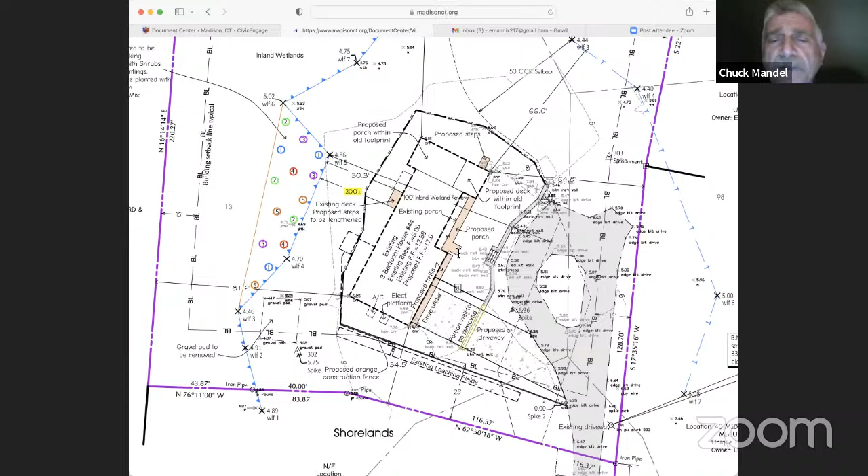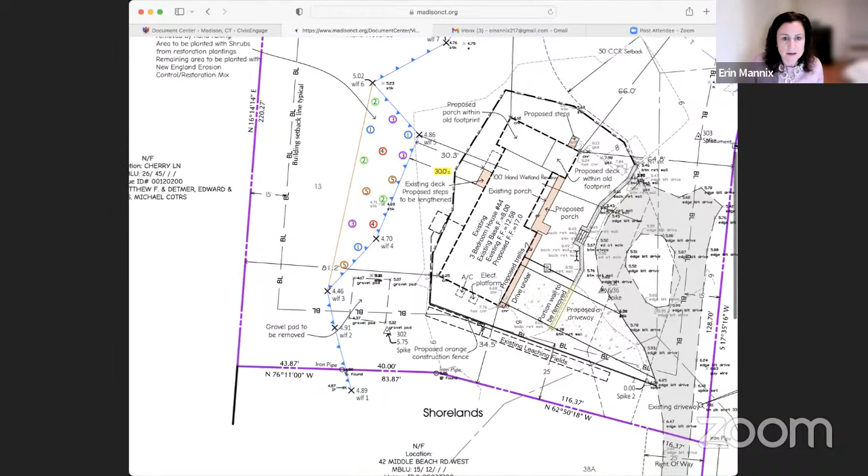This is the updated plan that our office received either yesterday or today, highlighting both noting that Bob Russo was the soil scientist of record, and also his recommended plantings here, hand removal of wood chips, and planting of New England restoration mix, and the shrub list, the native shrubs here, as well as their quantity.

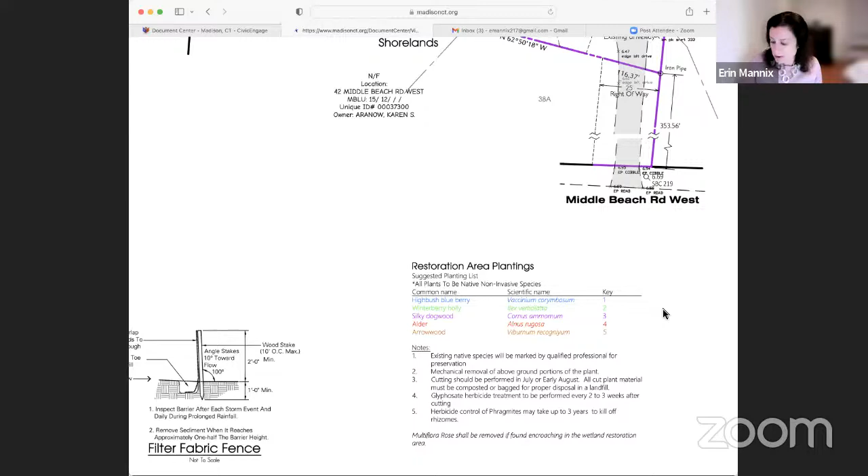And then there was a supplemental report. Yep, I could share that as well. That one came in today in case the members haven't had an opportunity to read that. I do think, Erin, it's short enough, we might as well just put it on the screen so some commissioners can see it.

The only other question, I can't remember if you just mentioned this, Chuck, I apologize. There was just a request to have some detail that the portion of the retaining wall was going to be removed, include the drive, and then some elevations here as well shown. Right, so there's a proposed grade, so there won't be a wall there. It's going to be a sloped section.

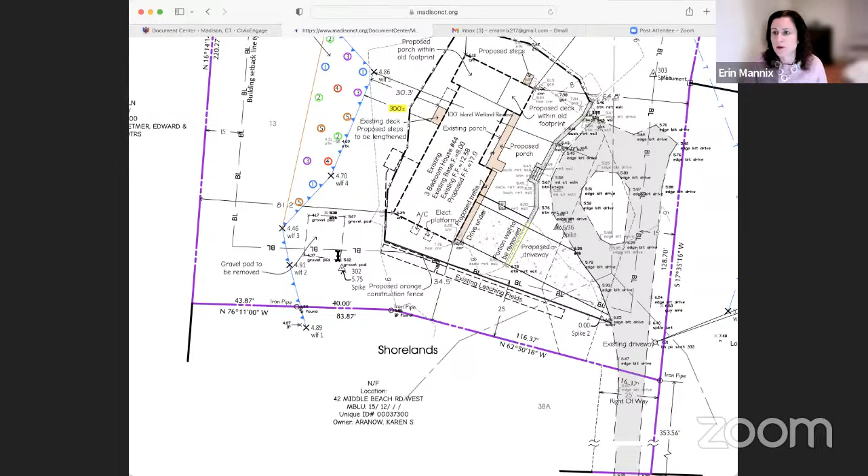But the wall is removed. There's also a note on the plan, based on the site visit. There was an existing gravel pad installed at a prior date, and the applicant has decided to remove that. My assumption is it would revert to a grass or lawn area. Is that correct, Chuck? He's not planning on putting a lawn there. I think once the gravel comes up, whatever native species fills it in, we'll just let it fill in.

Let me get you Bob Russo's report as well. This is from Bob Russo at CLA, identifying that he has visited the site and reviewed the scope of the project. Species were chosen because they're native and suited to the hydrology on the site, providing local benefit for wildlife and aesthetics.

Invasive species control involves oversight by a qualified professional, with 3 years of treatment and removal. The timeframe will enable the existing and planted shrubs to become well-established and dominant over the invasives.

So the question would be, moving forward, if the agency wanted to require an annual report for the 3 years of monitoring the invasives and removal, as has been recommended by the soil scientist. Yeah, that was my question, because the monitoring isn't on the plan.

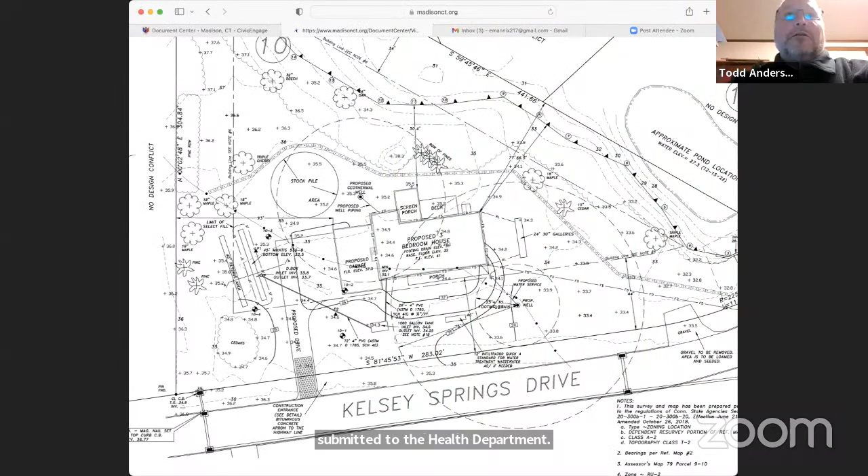So the house got moved over 15 feet. He did a slight revision to the house where he wanted to add more of a front porch for aesthetic reasons, which increased the square footage of coverage. So it actually pushed it back a couple feet more from the road than what we had before.

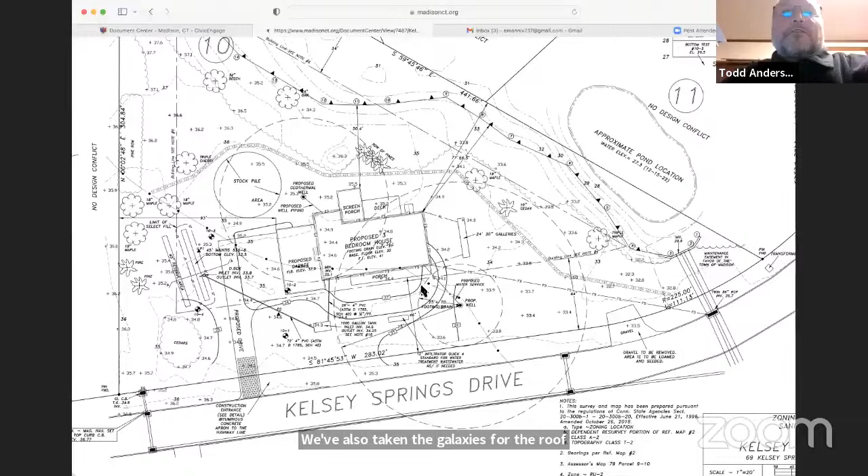We've also changed the galleys for the roof leaders. Instead of using the StormTechs, we are using 30-inch galleries and putting them parallel with the house rather than at an angle, which moves our limit of disturbance about 20 feet further away from the pond. So we are about 1.5 to 2 feet closer to the rear wetland boundary, but 15 feet further away from the pond, and about 20 feet further away from the pond with the limit of disturbance.

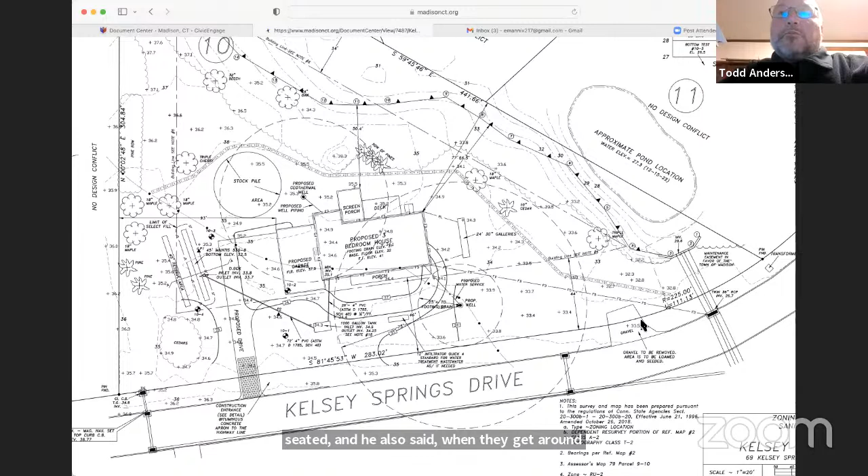As was discussed at the last meeting, the gravel area, which the client said he was going to revert to grass anyway, was not on the plan. So we've added that to the plan to note that it will be loamed and seeded. He also said when they get around to paving the driveway, he will install a curb at that location, and also at the existing curb cut, which is about 20 or 30 feet further toward the pond from the proposed driveway.

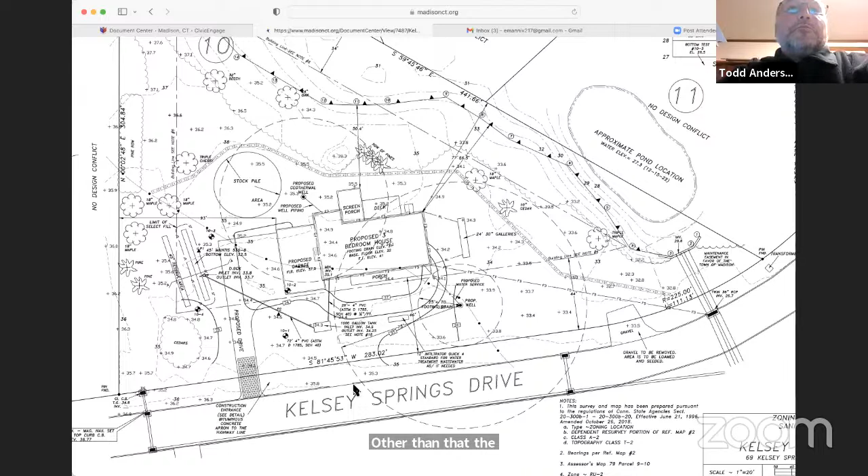Other than that, the stockpile location got moved back a few feet to accommodate the moving of the house and everything.

The other thing you were asking about was the location of the piping for the geothermal well. That's only a water line, similar to a domestic well water line, that's going to go straight from the well to the house. Other than that, we have not changed anything. Obviously, we shifted the septic over and turned it sideways to accommodate the moving of the house.

I'm confident that the health department will approve this the way it is. If anything, they may require us to raise the system a little bit if they feel uncomfortable with the depth we've designed it at. But that is not going to change the grading. That is still located outside of the 100-foot review zone. We have plenty of pitch to get from the house to that septic.

So it wouldn't be a case where if we had to raise the septic, we'd have to raise the house and change any of the grading in the front of the house. So even if we had to do any revisions to the septic, that would not affect anything within the 100-foot review zone. I think I've covered all the changes mentioned at the last meeting. So I'm open if you have any new questions or comments.

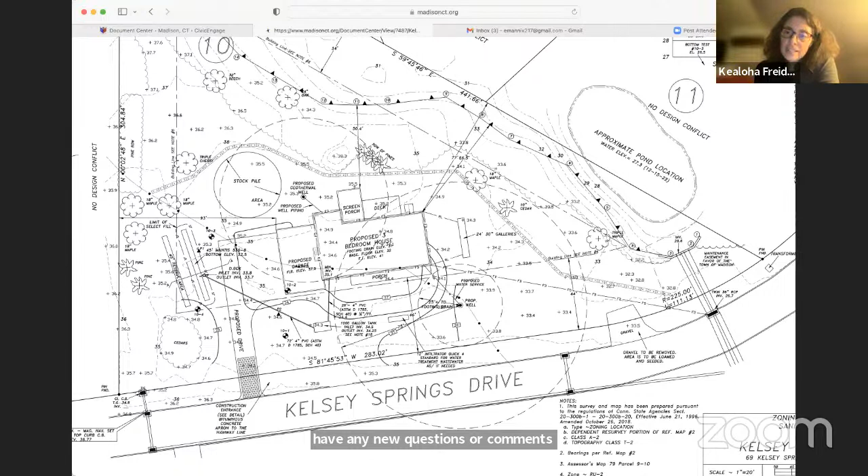Yeah, I have a couple of quick questions. The geothermal proposed well is next to the stockpile, if I'm reading the plans right. Is that correct? Yes. And the pipes coming into the corner of the house - I don't see it on the plans, but is that right? Yeah, right from the geothermal well, it's kind of at a 45-degree angle to the house. That pipe would be coming right into the basement in that area.

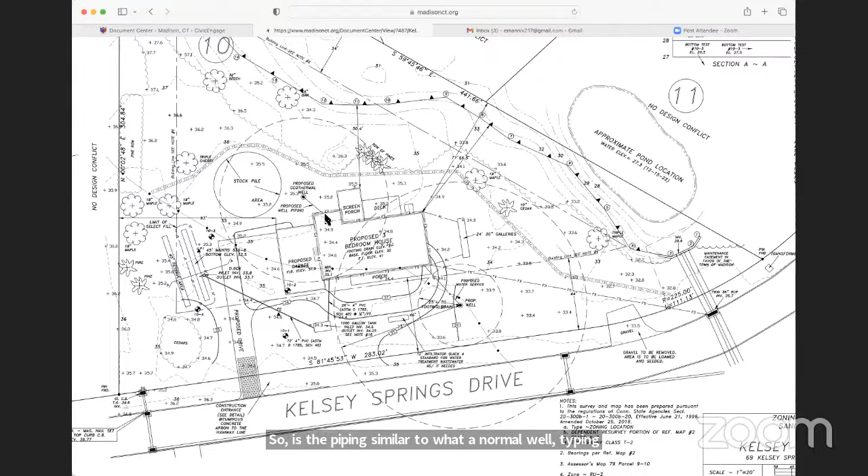And as a bit of a layman - so you've got to pipe it over to the house and pipe it back, because it's a closed loop system, correct? Yes. So is the piping similar to what a normal well piping would be, like in the front of the house? Is it similar in diameter, or larger to accommodate more water flow? I'm not a geothermal expert by any means, but the couple geothermal wells I did see being installed, I think the piping was similar to a force main for a septic, like 1.5 or 2 inch or so. It's not huge piping, whereas a domestic well I think is like 3/4 inch or 1 inch piping.

So the level of disturbance won't be too great then. That's what I'm getting at. Yeah, all right, thank you. You're welcome.

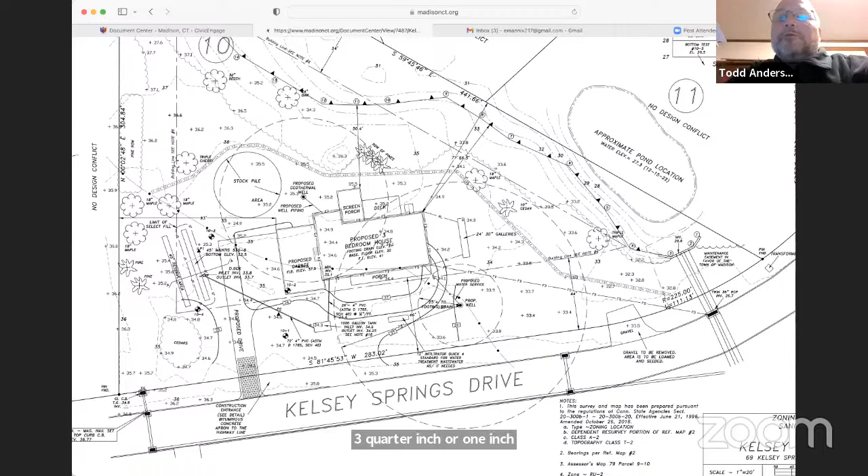Other questions? I just want to add that I have a geothermal system on one of my houses, and that description of the diameter of the piping is accurate. I found, like any well installation, it's the actual drilling of the well and the tailings coming up that tend to be more of a mess than perhaps a trench for the water line. So as long as the erosion control is in good shape there, I don't think that would be a problem, especially in these sandy soils.

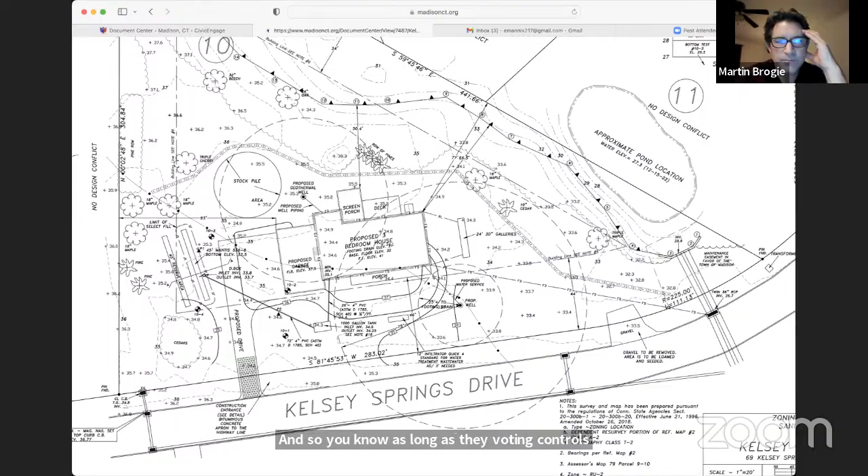I'm glad the house shifted over. I was out on the site today and looked at the previous plans and was thinking the same thing, that an increased buffer around the pond would be a good idea. So I like that change in the design.

I also like the limit of construction as it stands. It's within the field and doesn't encroach on the existing tree line, those cedars, or the little pines. I think that buffer along the wetland corridor, and certainly by the pond, is important.

And maybe there might be some consideration around preserving that to the extent practicable. Lastly, I apologize, I missed the last meeting, so I'm not sure if there was any discussion around the functions and values of that pond. I saw Snarski's report and it talked about the vegetation, hydrology, and soils associated with the wetland. It was a brief report, but I don't know if anybody mentioned the value of that pond or if it was discussed. I'm just putting that out there.

The pond's functions and values weren't discussed. Is that pond... I'm just looking at the plan. So I guess part of it's on the property. Yeah, a very small portion of it is.

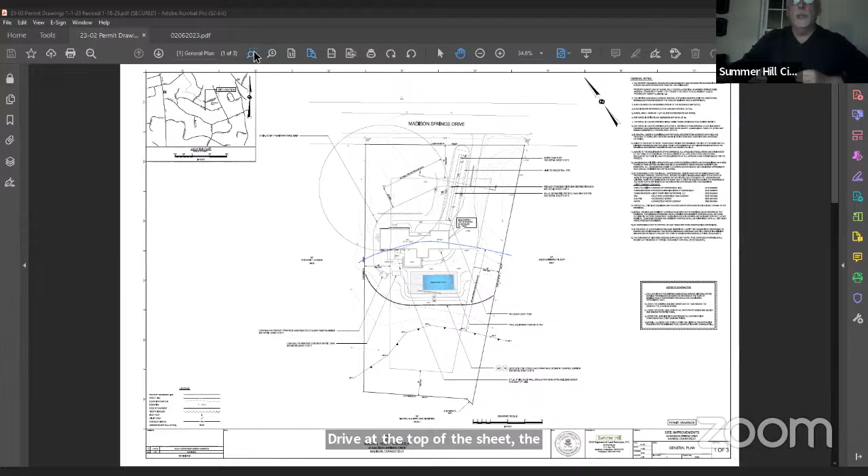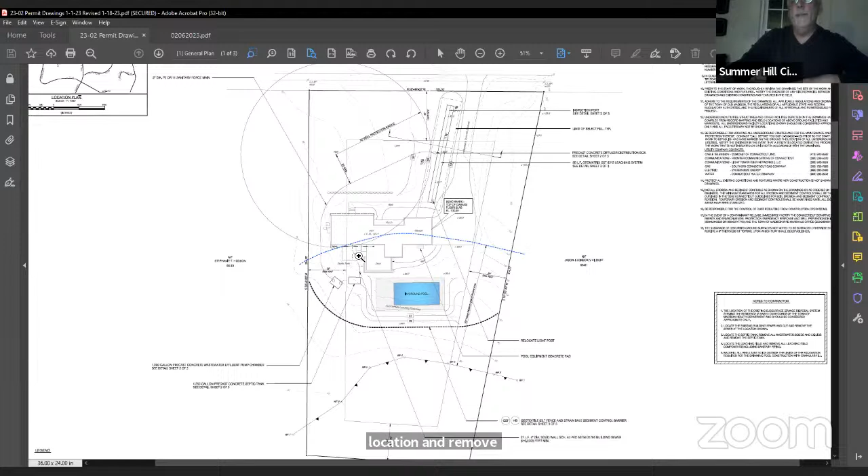And all of that would allow the construction of this in-ground pool that's shown. This is an 18 by 36 pool with 4 feet of patio on 3 sides and 14 feet on this side.

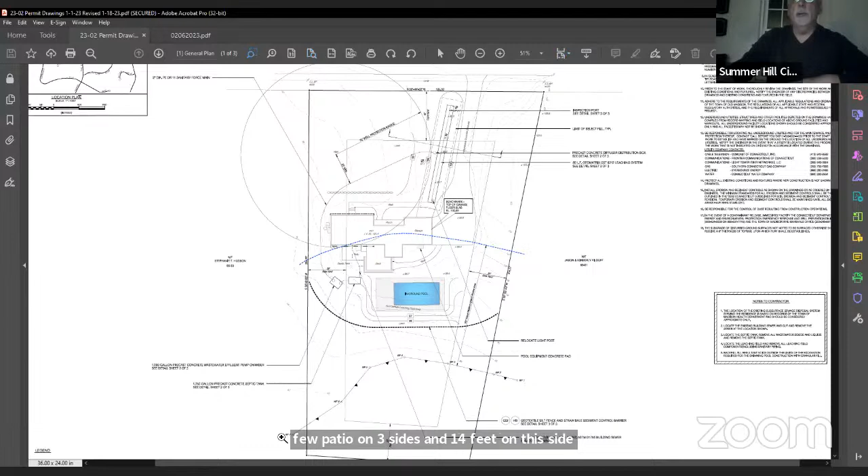Those of you who were on the site walk probably remember the site. There was a lot of, I think it's Pachysandra, ground cover in the wetland, a very large tree stump roughly here - I guess the tree had fallen on the roof of the house at some point. And it was lawn. This area that we are disturbing today is lawn. So the limits of disturbance are defined by the sediment control barrier, this dark dashed line, which is in the lawns. All the activity will take place in the lawn.

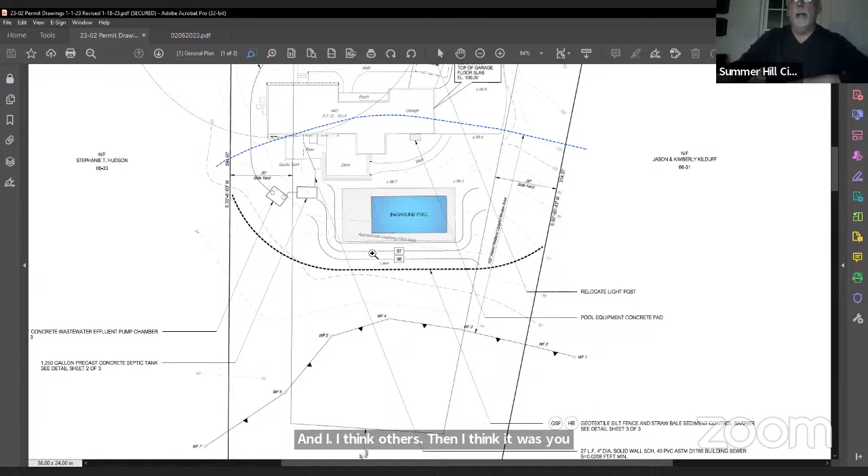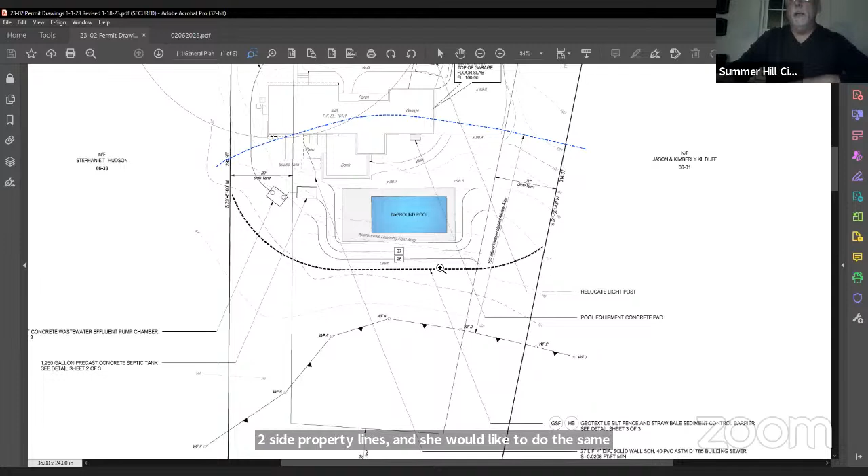And that's really it. I think it was you, Kealoha, who had asked about the fence at the site walk. And I spoke with the owner, and the owner would like to, just like her neighbor on this side, do what a lot of people do - they'll put a dark color, black or green wire fence, kind of in the wooded area on the side, on the 2 side property lines. And she would like to do the same thing across the back, and it would go no further into the woods than 5 feet or so into the wood line. So I think that's really it in a nutshell. If you all have any questions, I'd be glad to try to answer them for you.

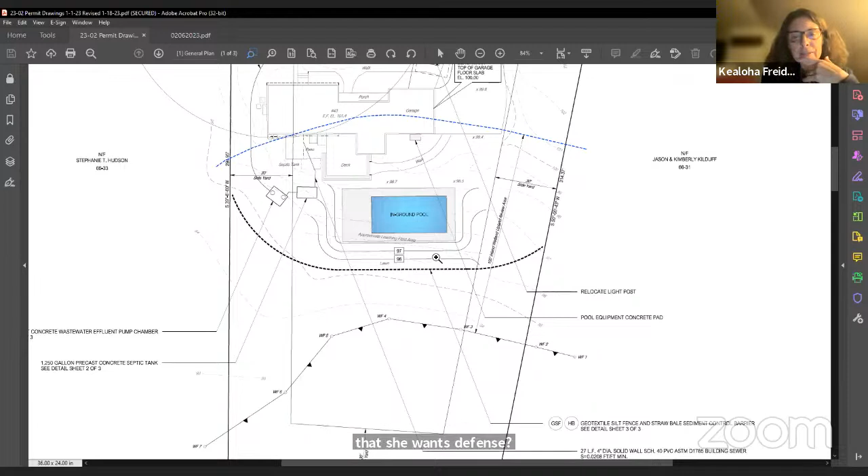Could you clarify what you mean? Are you saying no more than 5 feet into the wood line? Are you saying that she wants the fence at what you have as the limits of construction, or wherever you're going to have the erosion control?

It's close, yeah. I think I had explained when we were out in the field, the survey was done before I got involved, and the survey doesn't show the limit of the lawn and the edge of the woods, but I estimated it by measuring off this deck here. So yes, the fence, the rear fence, required by the building code, would be roughly where the sediment control area is, and it wouldn't be a chain link fence.

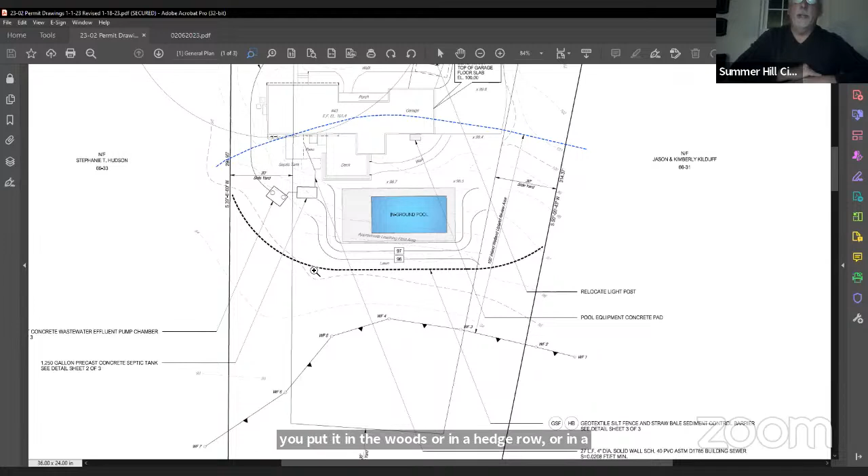I'm assuming you're all familiar - a lot of people will, in order to meet the building code, have a fence at the right height, but if you put it in the woods or in a hedgerow or in a landscaped area where the plant material is relatively high, they'll just use a wire fence. So visually it kind of goes away, the fence doesn't really jump out at you. It's much more attractive, but it meets the requirements of the building code. So that's what I meant by a wire fence.

And just to be clear, that fence isn't shown right now on the plan. That dashed line is soil erosion, right? Yeah, the dark dashed line is the sediment control barrier. Okay, right, yeah.

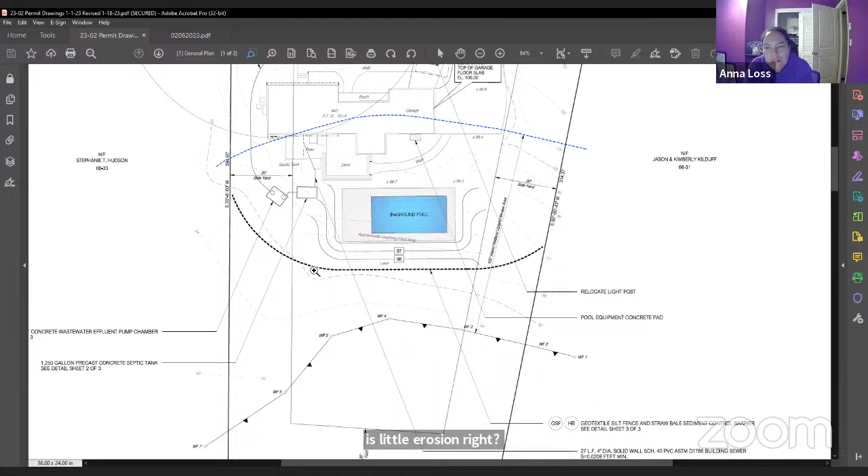Hey Mike, it's Bob. The distance from the sediment erosion barrier to the actual wetland markings, I'm trying to gauge that. It's about 30, 35 feet. It's actually from wetland flag 4 right here, Bob, if you can see my cursor. Yeah, I see it. Straight up perpendicular to the barrier is 24 feet. 24, okay, this distance right here.

And what's the grade from the sediment, from the silt fence? Is it pretty gradual down to the wetland boundary? Yeah, I think so, it's pretty gradual.

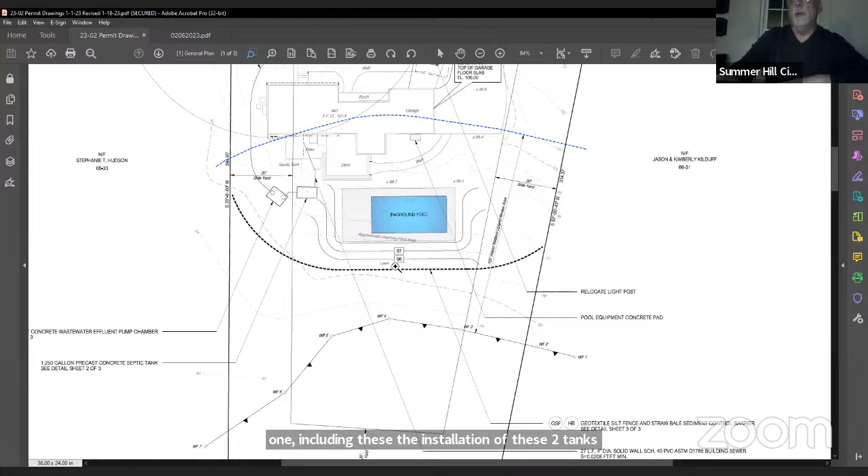Are we disturbing trees or plants within the area or the scope of work? All of this work is in existing lawn today, including the installation of these 2 tanks. Everything within the limits of the sediment control barrier today is lawn.

So no, there's no removal of any vegetation. It's all happening within a lawn. All of the work is within a lawn.

I have a quick clarification here. So the sedimentation control barrier is shown about 24 feet from the wetlands? At the closest point, at wetland flag 4, this perpendicular distance is 24 feet. Okay, and the proposed fence, is that going to go at the line of the erosion control? Yes, that's what I was trying to say. Okay, but it'll be more perpendicular to the sidelines.

It has to, of course, be parallel to the long dimension of the pool. Then it'll go up to the property boundaries on both sides, and I'd imagine it would hook back to the corner of the house here. And they would have to enclose the whole area by building code.

The fence is in a grassed area, and the 24 feet between the fence and the closest point of the wetlands starts to become wooded. We don't see a wood line on this map. I did take a peek out there, and it looks like lawn right up to the wooded wetland, and the report is consistent with that as well.

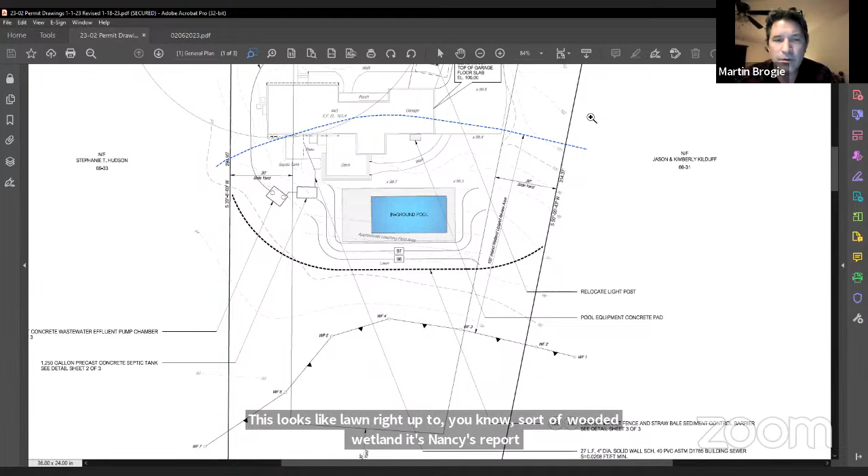So it looks like we've got some lawn, even behind the fence. Yeah, I don't know if you heard me, but the surveyor who did this survey did not delineate the edge of the lawn and the edge of the woods. Rich Snarsky was not involved in this project. Actually, Bob Russo delineated the wetland boundary.

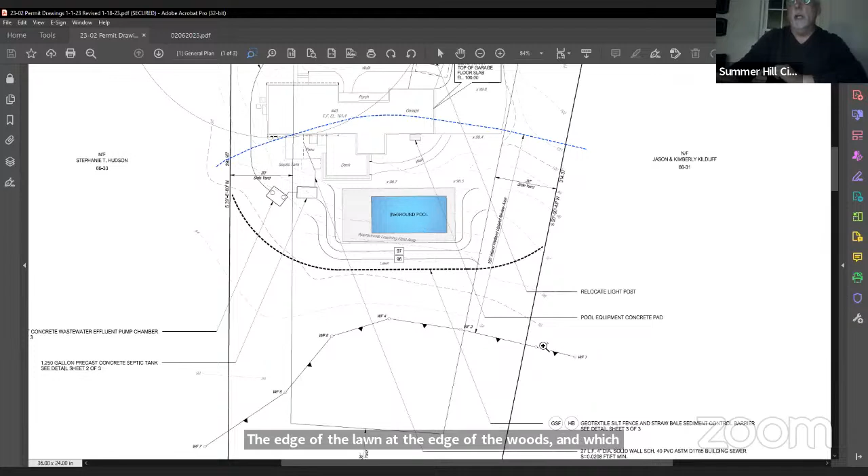Oh okay, I'm thinking of a different report. So there was actually no report associated with this application, just a delineation, as I recall. Is that right? That's right. There's a note on the drawings that Mr. Russo delineated it. I'm sorry, I have that confused with another report. Oh, that's okay.

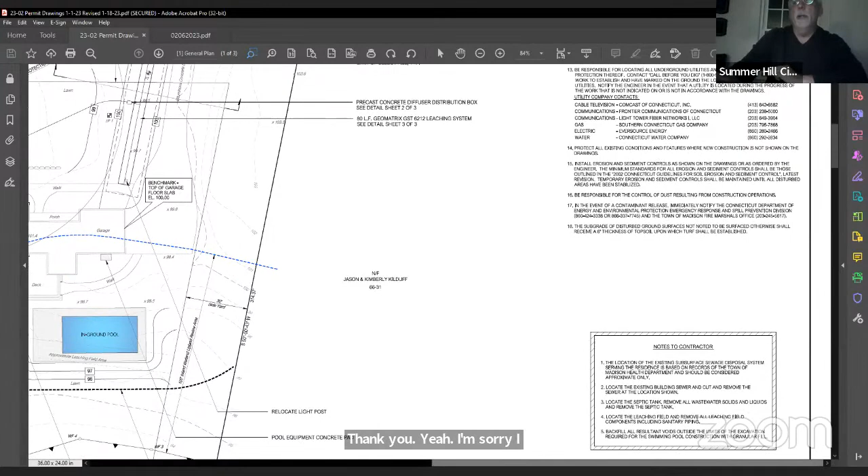So all of the construction, with the exception of the installation of the wire fence, will occur within current lawn area. The wire fence here is, by my estimation, 5 feet or so into the woods.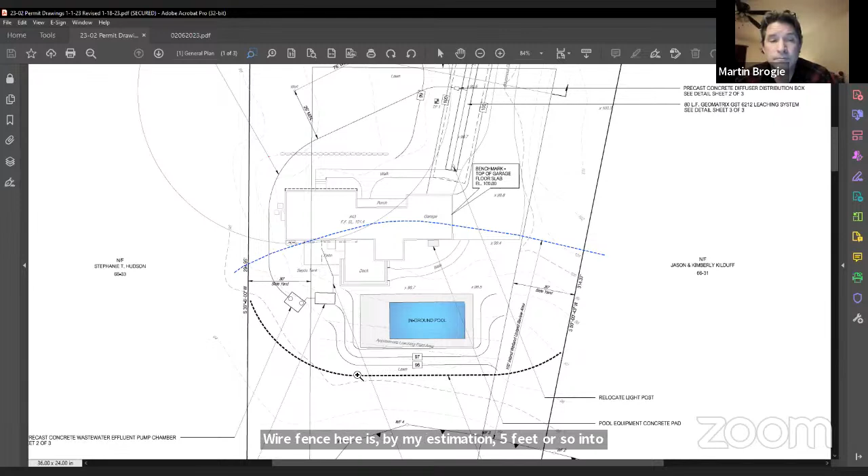That's what I was trying to explain. So I guess the erosion control, Martin, is into the woods then too? It's right at the edge, by my measurements.

Go ahead, Kayla. Well, it just seems that it would be helpful to have... because you're saying you're estimating it's going to be 5 feet in, but then saying it's right at the edge of the woods. So it might be helpful to have the fence on the plan at some point.

Well, I can certainly add the fence to the plans, but it's a wire fence. They drive a metal post into the ground, it's not a chain link fence. They drive a typical inch-wide green metal post into the ground and clip wire fence to it. That's the only work that will take place right outside the edge of the lawn.

I can certainly revise the plans, take measurements, and show the fence accurately on the plans, and submit those plans to Erin, be glad to do that. Well, I think that would be helpful. Yeah, it's kind of an obvious omission, but...

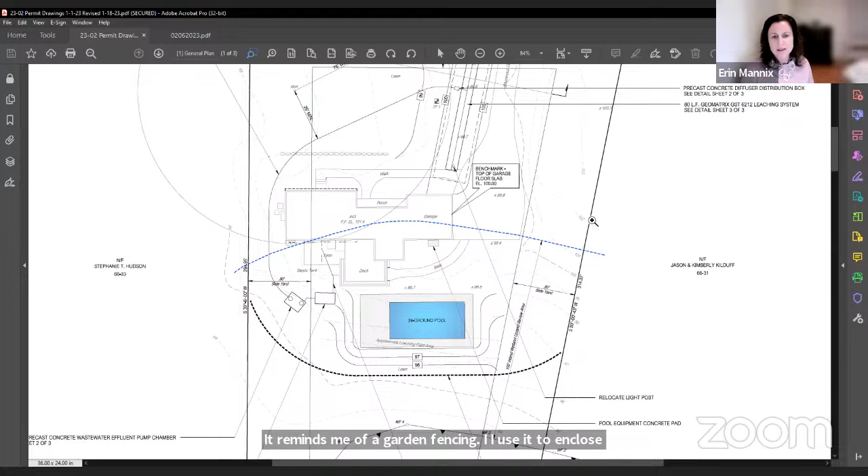I just have one question - as far as if it's metal, it reminds me of garden fencing, the kind I use to enclose my garden. Is it preferred by the commission that it's on the inside, on the lawn side, rather than being within the wooded area?

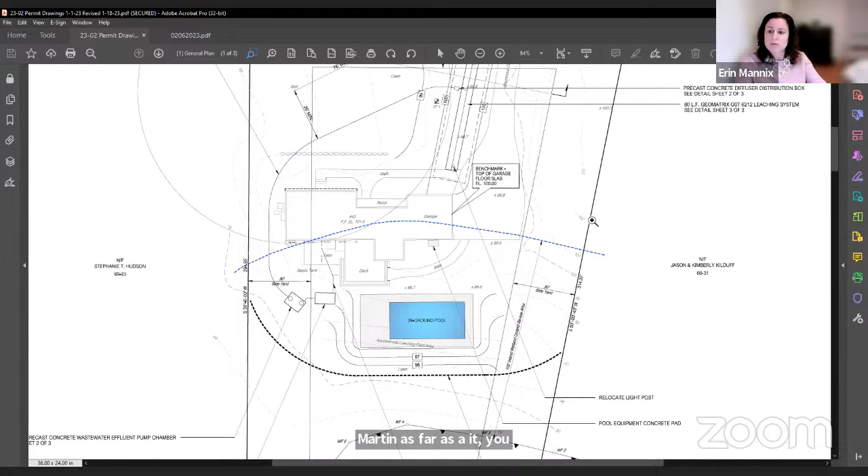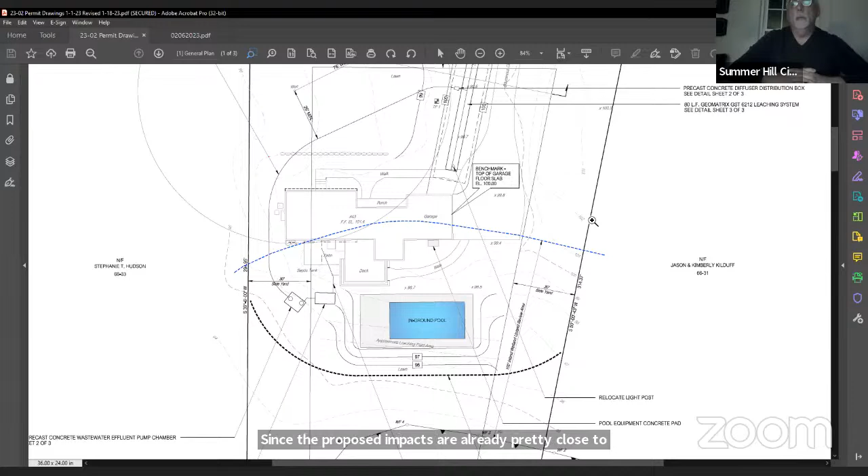I'm not clear as to what your concern is, Martin - whether it's creep of the lawn area into the wooded area, or if it's specifically for animal use. I'm just trying to get clarification on what you're looking at, since the proposed impacts are already pretty close to the wetland boundary - 24 feet's pretty close.

It sounds like the fence is getting into the wooded buffer, the vegetated buffer of the wetlands, and outside the lawn. The lawn seems to be okay - it's already disturbed, it's being mowed, the wildlife might go across it anyway. In terms of a wetland buffer, the lawn doesn't really offer much. But the further we move that fence into the wooded area, the more it becomes an impact to the wetland fringe.

To the extent we can keep the fence in the grassed area, or right inside the grassed area, I think is better. Since we don't have the wood line shown on the plan, I think we're not talking very specifically here so far. I think it's important to keep the fence out of the wooded wetland buffer, especially in this instance where we've got only 24 feet to the wetland line.

I'm sure the wooded area is outside that wetland line. So to satisfy the commission, if you're willing, why don't we make this a condition of approval that the fence be at the edge of the lawn and not extend into the wooded area. And like I said, from my measurements, that would be at the sediment control area.

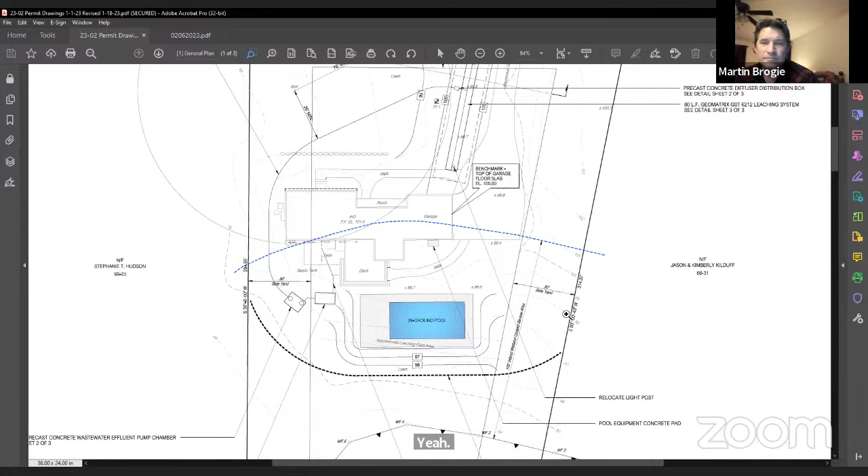If you're concerned about the wire fence creeping into the wood line, why don't we just make it a condition of approval that it is to be located at the edge of the lawn, which is pretty well defined if you were on the site.

That sounds pretty good to me. Yeah, that works for me too.

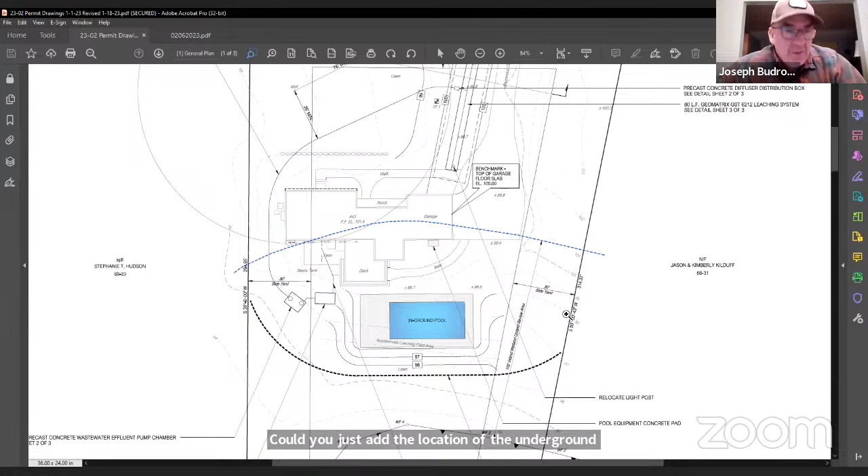Since you'll be adding symbology, Martin, to a future plan, could you just add the location of the underground utilities between the pool and the concrete pad for the pool equipment? I could, yeah, sure. Okay, that's it for me.

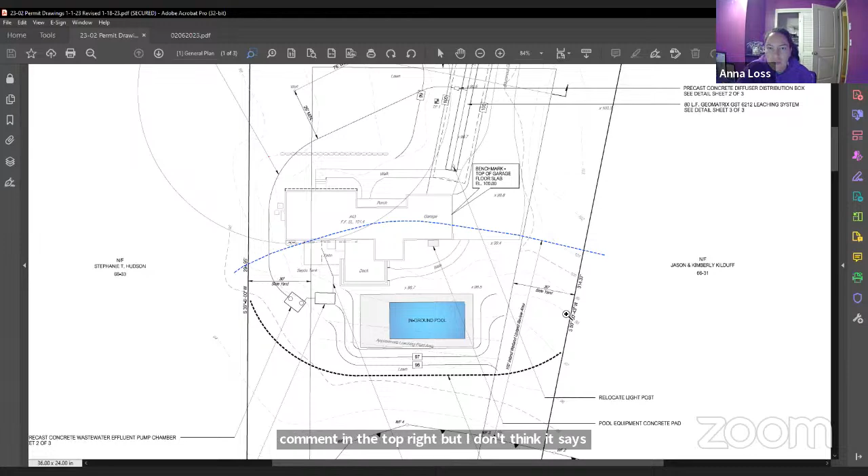Other questions or comments? I did have one question: is it listed anywhere who and when the delineation was done? I saw there's a comment in the top right, but I don't think it says exactly who and when did it. Well, as I said earlier, Bob Russo did it. I do not know when he did it. He did it for the surveyor. The survey was done prior to me being involved with the project, but the record survey indicates that Mr. Russo delineated the wetland boundary.

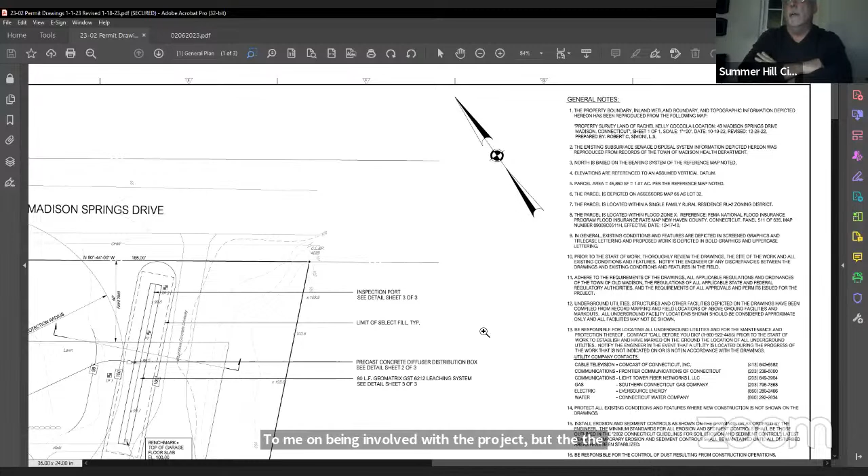I could look if you can hang on a second. That's what I was going to ask you, Mike, if you had a copy of the survey, if it had a specific note. I know the application identifies Bob Russo as the soil scientist, but that doesn't have a date. Bear with me one second. I can tell you in one second whether... I don't believe Bob was the original subdivision soil scientist on this project. That's what I was wondering. No, my thought is that he's been out there associated with the actual survey, but a copy of that survey wasn't in the application, just the reference.

So just for the record, Bob Russo was not the wetland scientist or soil scientist when the subdivision was done. He did it for the surveyor. And if you bear with me one second, I should be able to tell you. I'm sorry, I just have to find it. I do have a copy of it. I think it was only done a few months ago. The survey is dated December, I think, on your note.

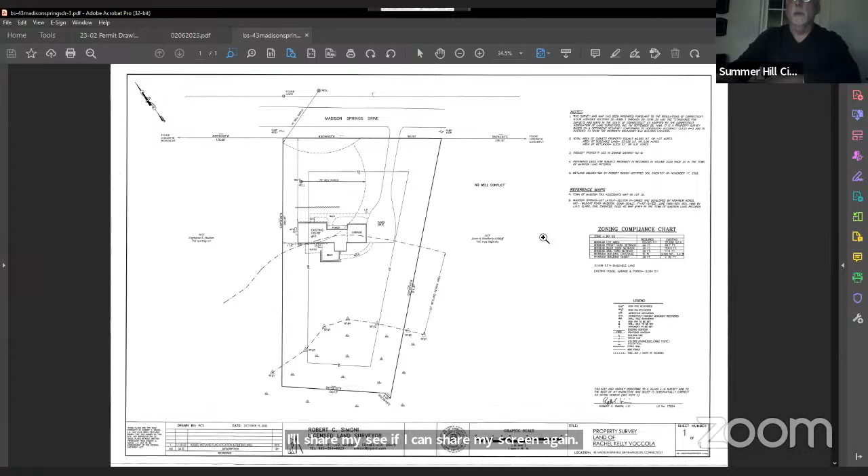November, let me share my screen. I'll show you the survey. It was November 17th of 2022. I'll see if I can share my screen again. This is the survey that was done, and let me just zoom in on the notes. Can you see note number? Okay. Yep.

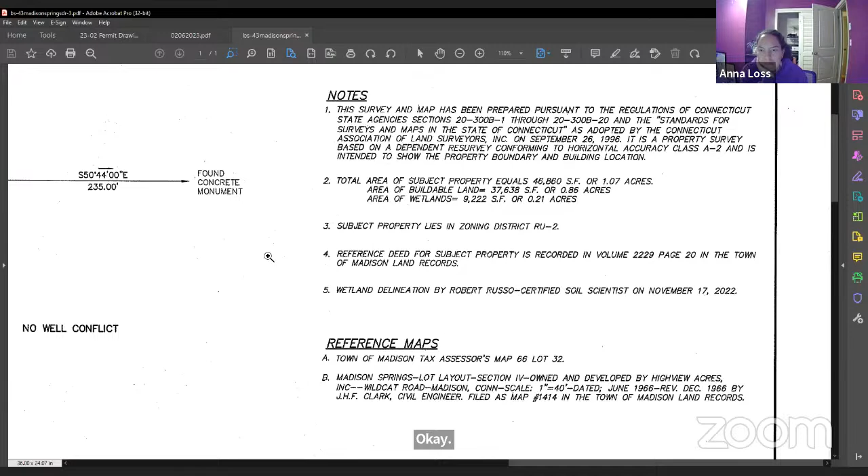That answers the question. Can you email a copy of the survey just for our file records, so we have it as reference, Matt? Sure. Then in case we're looking for it again down the road, since it's not filed anywhere else, we'll have it.

I have one last question, at least for me. I mentioned this on site - it's pretty shady, and I'm hoping the homeowner won't be disappointed in the canopy cover, given that currently there are no trees designated as being cut, is my understanding. Is that right? Yeah, no trees are being cut. In fact, no vegetation at all is being removed. Okay, I just want to be crystal clear that that's the case.

Other comments, questions for the applicant? Okay.

So I think we have some modifications for this resolution. I can share what I have here, and we can move on to a number 3, I guess, would be a condition.

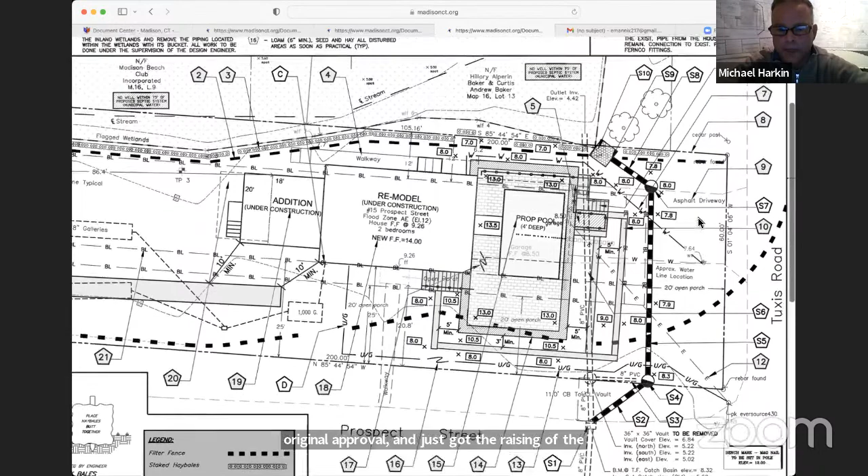At that time, you guys, more so the town engineer and Aaron, said we need to find out more detail on that existing pipe. So we removed the pool and the drainage off the original approval and just got the raising of the house to be FEMA compliant and the addition approved. Over the last 4 months, we've been working with Aaron and the town engineer to rectify the matter with that easement.

Aaron had the public works go out there and dig up the pipe so we could locate the end of it, which we did. We then put together a drainage plan, which the town engineers reviewed and had us tweak a little bit. They were satisfied with it. So then we came in with the application you see here, which is the pool and the terraces as they were before, and the relocated storm drainage pipe that's been approved by the town engineer.

Since then, you've gone on a site walk and looked at the area. There were some inconsistencies with the survey, and Aaron reported back to me after the site walk. So we sent the surveyor out there to do a detailed survey of that area, showing all spot elevations. Aaron came back and said there were a couple of trees you guys had questions about, whether we can keep them, so we put those trees on there.

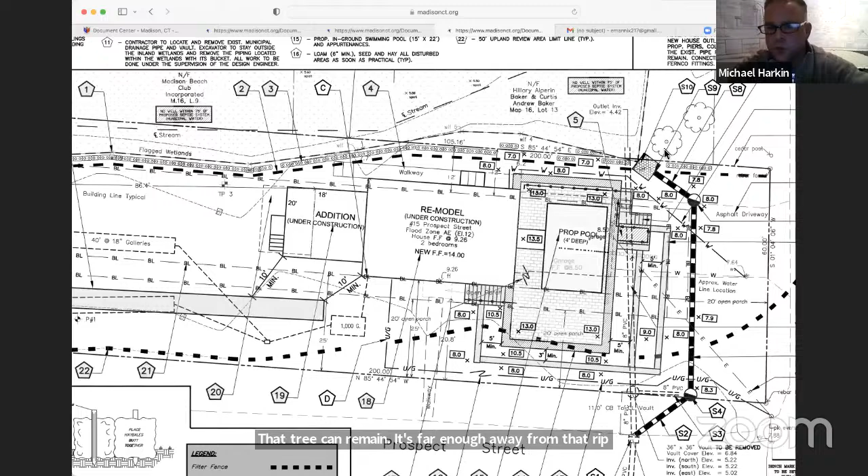Aaron can point to them. That tree can remain—it's far enough away from the riprap pad that the town engineer wanted. If you can zoom in on the detail of that area we put together: we did a 10-scale detail of exactly what's happening there, with a lot of spot shots. We have proposed and existing grade, and then the area which will be dug out to get that riprap splash pad in there.

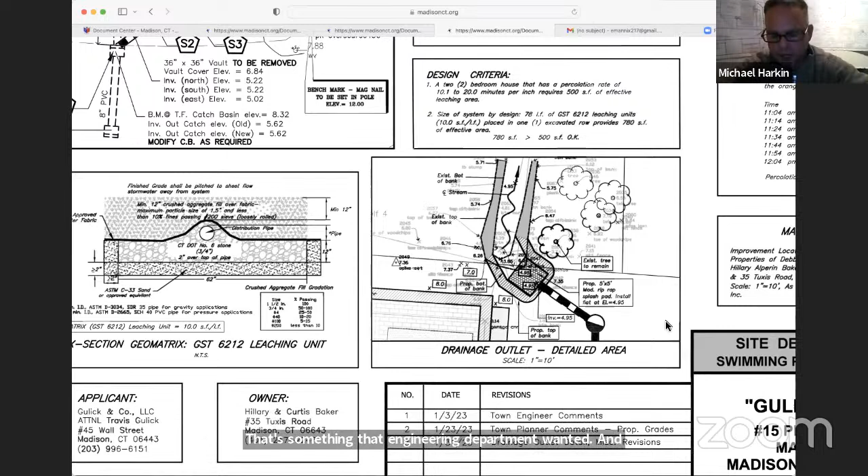That's something the engineering department wanted, and Aaron and the commission had some concerns. So we asked our soil scientist, Rob Russo, to put together basically a full report for the project, which we did. I know Martin had requested that last time we had this application in front of you, so we had that report done.

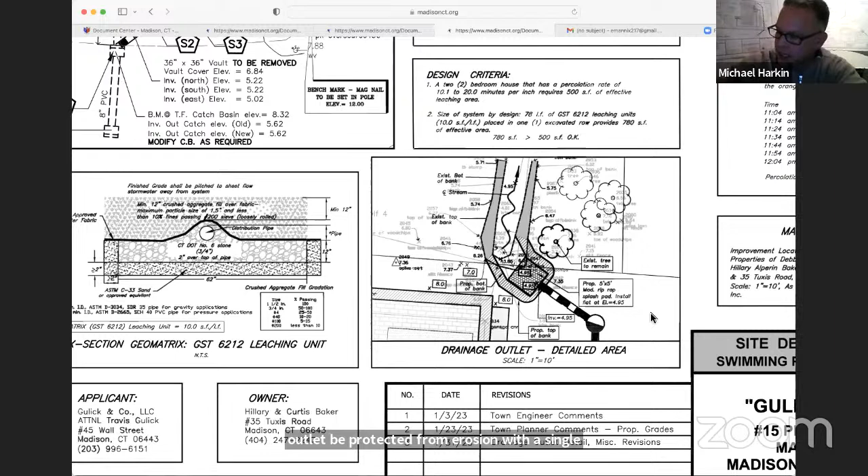Aaron also wanted them to look at how to stabilize that slope. One of Rob Russo's last paragraphs in the report confirmed rerouting the drainage pipe as shown on the reference plans does not pose potential for long-term or construction-related impacts if the erosion control measures shown on the plan are adhered to. CLA recommends that the steep slope around the new drainage outlet be protected from erosion with a single hand-placed layer of round field stone that is 10 to 18-inch diameter, and we agree to that.

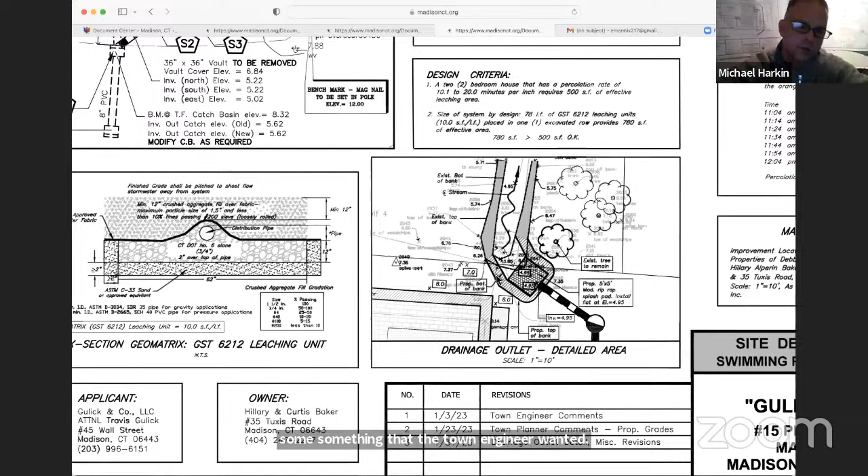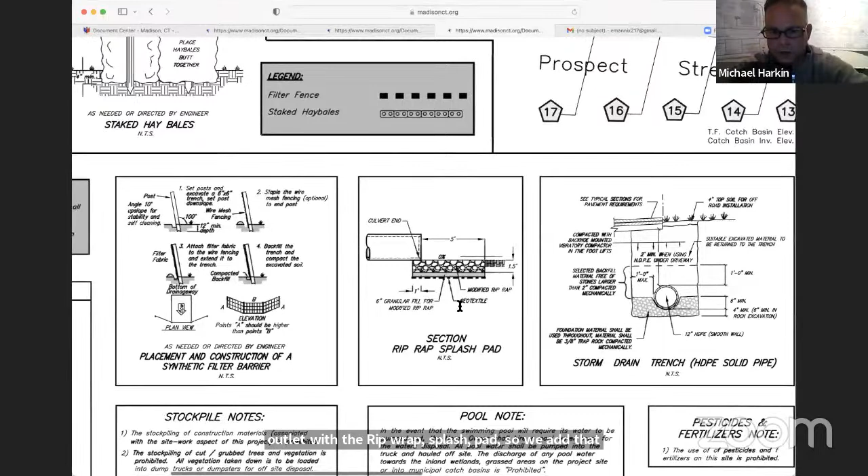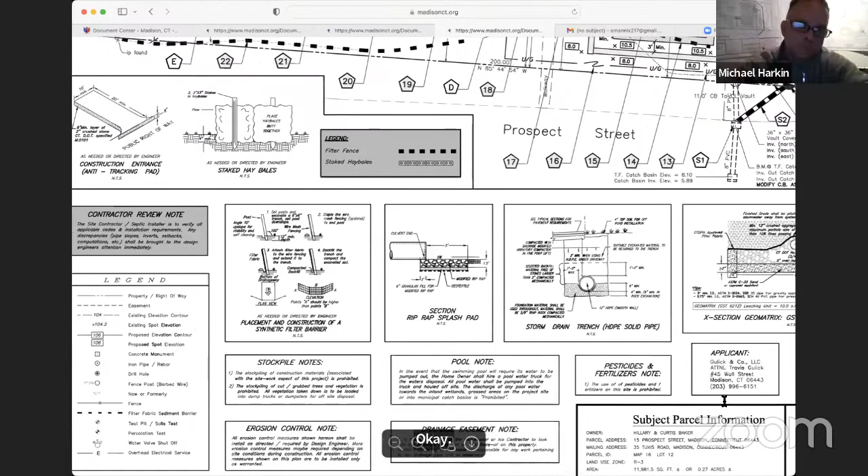So where we're at with the whole project is we're in front of you tonight hopefully for approval. We do have the easement map and description sent to the town engineers, which will go to the town attorney, and then we'll file that easement. So there's a legal town easement on this property. With that being said, that concludes my presentation. I'd be happy to answer any questions that anybody has now that I can hear you.

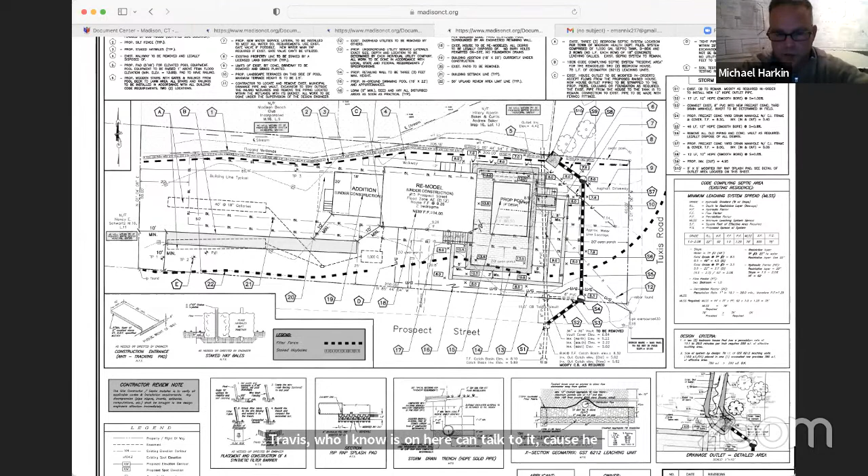So I just was curious if you're familiar with that little retaining wall, when that was done. I'm not familiar with it. Maybe Travis, who I know is on here, can talk to it, because he did a detailed analysis of the site before construction started, and he's also the general contractor on the project. Yeah, I can speak on that.

I'm looking through my photos right now of the whole job. I'm not really sure what retaining wall you're meaning. I don't believe there was any purpose for an impromptu retaining wall. I mean, I know we have the silt fence going along.

We have some wood chips along that to keep it down. There were some stones, 2 feet in diameter, stacked maybe too high with some stone on the inside, dropped right down next to the silt fence, and they looked pretty fresh, like a fairly recent installation. I just was wondering when that happened. Obviously there's been a lot of activity on this site in recent days with the carpentry work. Where was it? Near their addition in the back corner? Yeah, exactly, right around in there.

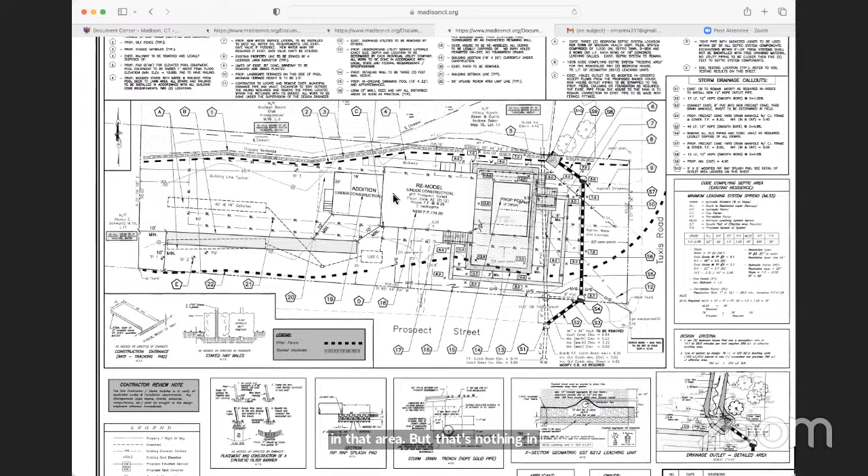I know there was a sidewalk back there that has always been there, and remember where the addition was, there was an original structure, so there might have been something left in that area, but nothing intentional was put there. I don't know if the excavator just had a couple of things of rubble there. Yeah, I can go out and take a look as well. But needless to say, that won't be part of the... I actually have a photo, I don't know if anybody can see it, but I can't really see it myself. Needless to say, they won't be there by the time everything's done on the site.

Well, they probably need to be there because they maintain the elevation behind the building where the walkway is shown, and they're right against the wetlands. So that might have already been there then, if that's the case. It looks pretty fresh, though, and they're not stacked too high, just maybe 2 feet in diameter in a row of 4 or 5 of them. Okay, and again, this is a tough site.

Maybe Anthony Lafata, when he was digging that out, did that on purpose. There was fencing and probably some erosion going on there, and somebody took care of it. It looks fine, I was just curious if it was part of any permitting.

This is sort of an active site, and the wetlands are right there. I did notice one location where a tree had fallen over the silt fence, and this is a site where we have to be really diligent about maintaining those erosion control measures along the back of the property. That's something, Martin, I'm happy to either myself or my interim inspector, who's been assisting me, meet Travis on site and look at that.

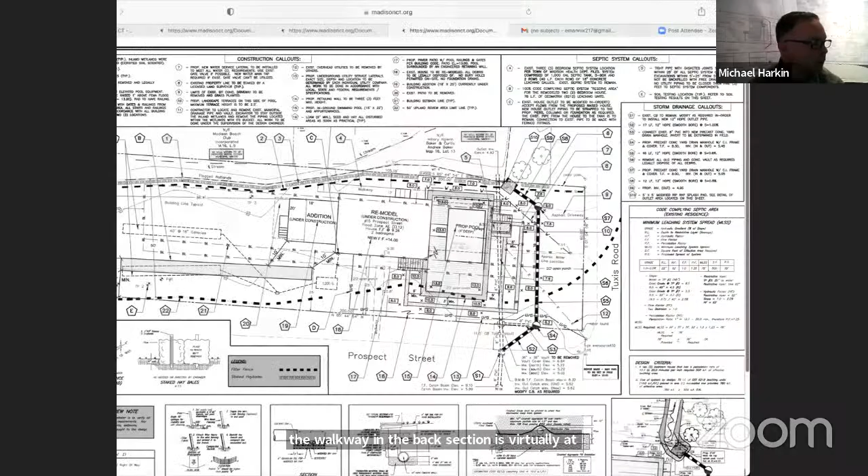So, Barnett, the walkway in the back section is virtually at existing grade there. One of the erroneous spot shots we had was an elevation of 10 — right now we brought that to elevation 8, we corrected that at the back of the wall. You could see elevation 8, and there's elevation 7 right there that's existing. So against the wall, we're coming up maybe a foot. That retaining wall is a 5-foot engineered retaining wall from a structural engineer.

So there will be a retaining wall up there to handle all that fill. You may have a foot of elevation rise over there, based on the design of that structural engineered wall. But for the most part back there, you're pretty much at existing grade. Okay, that's for the pool area.

What about further west along that walkway, item 4? That's not associated with this specific application. That was part of the original application, and there was no change. Instead of trying to rip that out and creating more havoc, we decided we can just leave it and not disturb it.

Okay, just here to clarify grades. I know you went out there, the existing garage slab is still there on site, and that elevation of that slab is 8.5. So when you're standing on site, it's relatively flat in this area, except when we get to the actual drop off where the water course and the outlet pipe are. So the subject of this application is the proposed pool.

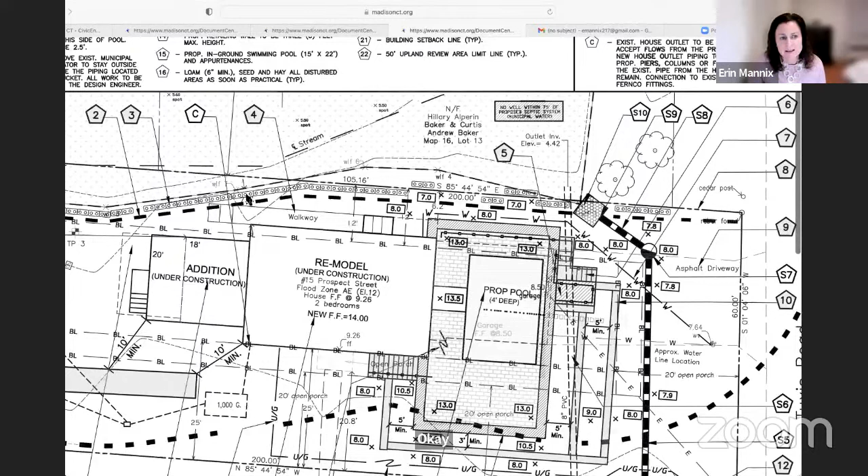So the existing grades here are proposed to be maintained. This is an existing elevation, 6 here, and here's elevation 8. So the site's between roughly elevation 7 in this area. But there was...

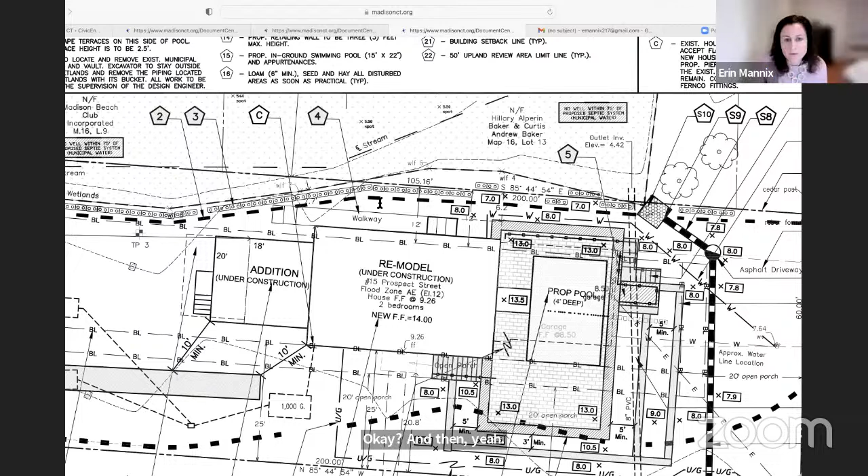It's sketchy, there are pockets back there subject to erosion and it looks a little unstable. Somebody put some stones there to support it and it's fairly recent activity and it doesn't seem to be part of what's going on. I just want to be able to visualize what the future is going to look like for that area, and to make sure the erosion control is up, which is outside our permitted area.

Now, I don't mean to be a total pain in the neck, but that erosion control is up and it should be maintained. I think it's important to look at it as the project moves forward.

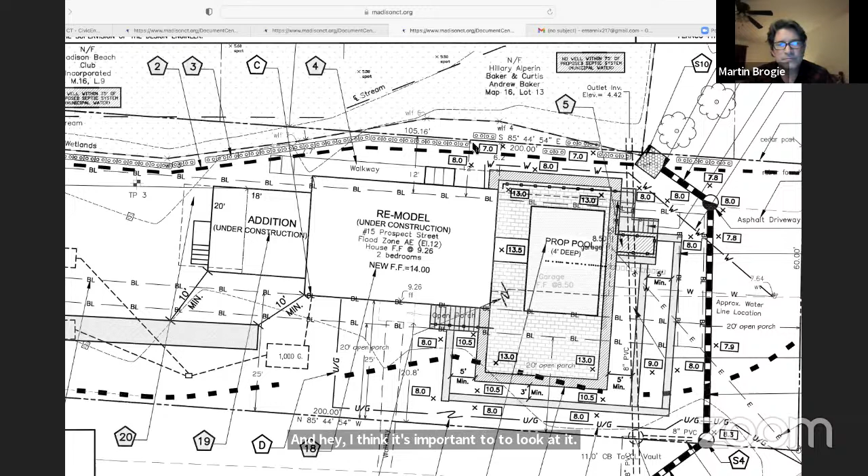Right, and definitely I did see from the storms there was a tree that came down, and there was one area - I didn't see the fence actually being compromised by washout, as far as overtopping. However, there were areas that were damaged from either limbs or small trees that had come down during some of that weather we had.

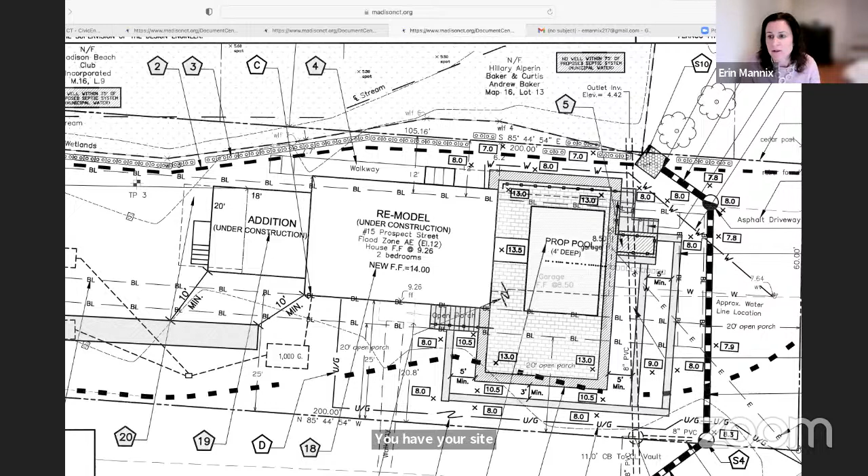So that would be - Travis, you'd have your site contractor go out and reinstall the areas that are damaged. I'll be happy to meet there with you, Erin, just to go over and double check and make sure everything is good, and we'll make it whatever you need.

So not an issue. The language, Martin, of the E&S - my standard E&S control condition is in that approval as well, so they would have to, at my direction, install any additional, whether it's a second layer of silt fence or staked hay bales, to help reinforce that if construction activities are encroaching near that limit of disturbance, just to protect that bank, so we're not getting into that sloped area.

That sounds good. The original plan, I believe, was just to seed and maintain that as lawn, basically how it had been.

There isn't a crossing or anything - this property is owned by the owners to the north, but there is access to this site up near Tuxas Road. So it's not where you have to walk through the wetland and cross over the water course to have access to this property. Even though it's being constructed as a single family dwelling with a pool, it's essentially being used by the property to the north as their pool house and guest house. So the intent is to use it as one parcel.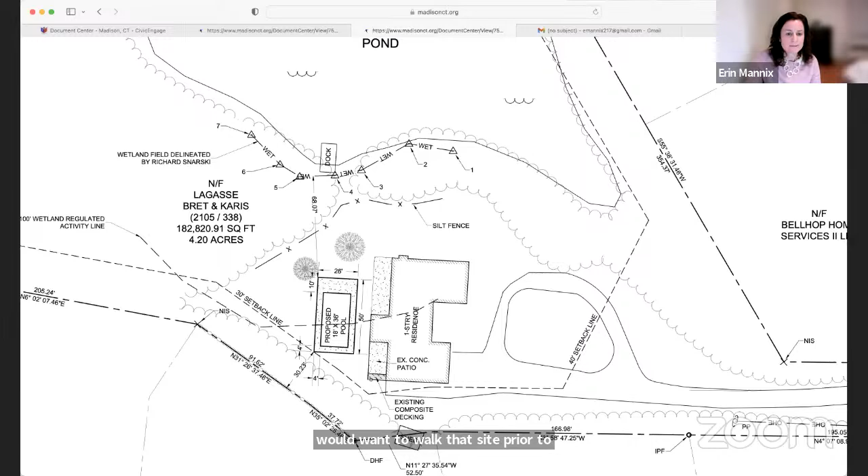I'm wondering, is the applicant here and listening, or is it worth providing them feedback at this point? No. So what we've been doing with our receipts is they're received, and then we are going through and deciding if we need to do a site walk or a public hearing or whatever it is. We schedule that, and then they come at the next meeting, and we can give them feedback, and then they have another meeting. They've got two meetings within our statute to get this settled.

Got you. So it's really the point of determining whether or not you want to go on a site walk, is whether or not you feel that the site development plan itself is clear enough, or provides enough information, or if you think this could be a unique site or something worth seeing actually in the field, to help orient yourself to the site and the proposal with respect to the wetlands.

And so that's what we've been doing - some places we have felt it's been useful to go and see them, and others we have felt it's fine not to see them, but of course we get more information from the applicant at the next meeting. So that's our decision tonight.

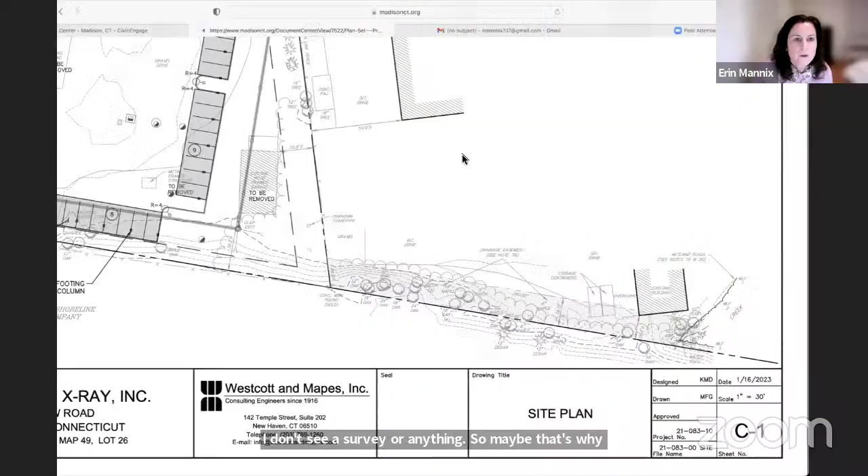I don't see a survey or anything, so maybe that's why. So I can show you here, if I zoom out - was this in our New Road document? Yes, all this is in the documents.

It's behind the architectural drawings, it's part of that plan set, Bob. Okay, so this is New Road here, and the existing driveway comes down. This is all existing building. There's a proposed front addition infill in this portion here, and parking lot activity. The closest inland wetlands are here on the right at the boundary, actually at the property line.

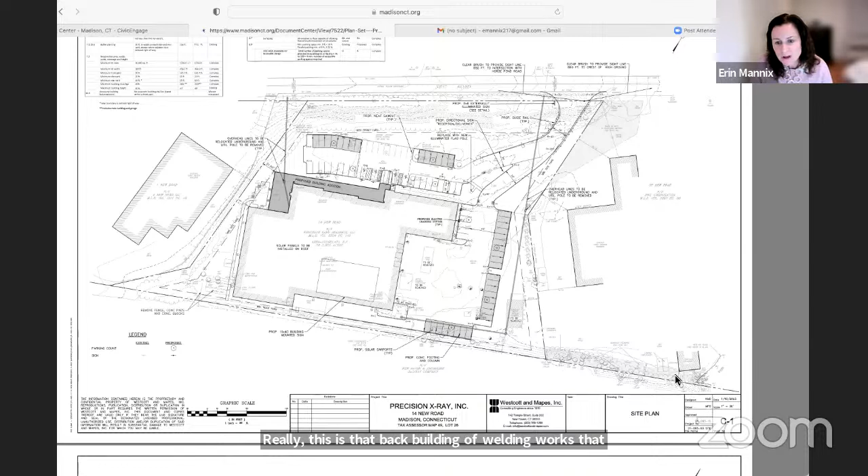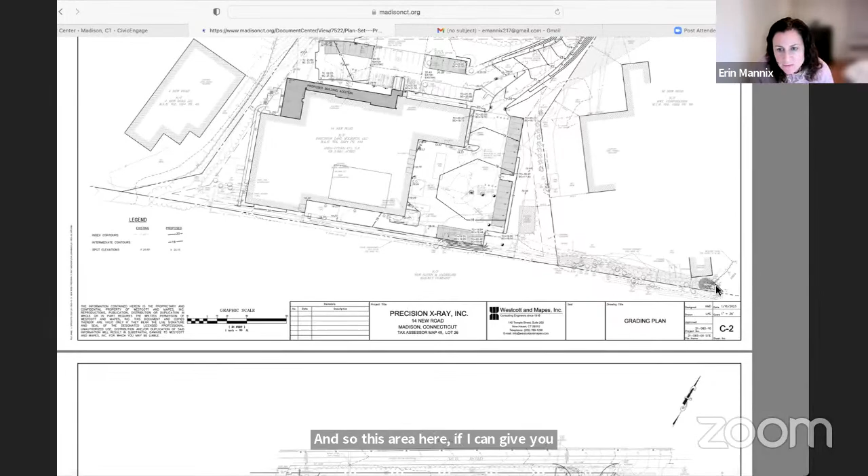Really, this is that back building of welding works that was having part of their addition removed. So this is down behind their site here, in between the railroad company, and this is where the existing outlet pipe comes out. This area here - if I can give you this grading plan, it shows the extent of grading for the outlet pipe, but there is a drainage plan here.

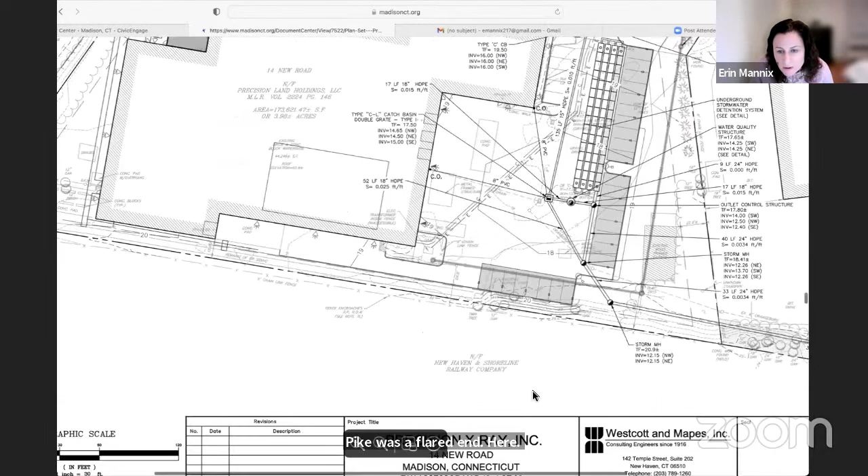It's a 24-inch, 309 linear feet of HDPE pipe with a flared end here. If I can zoom in, we may be able to see the wetland flagging, it's faint under here. We've got wetland flags 1, 2, 3 in here, and then 4 and 5. So this is where the existing pipe outlet is. There will be activity in here, and that's likely the area you would be most interested in.

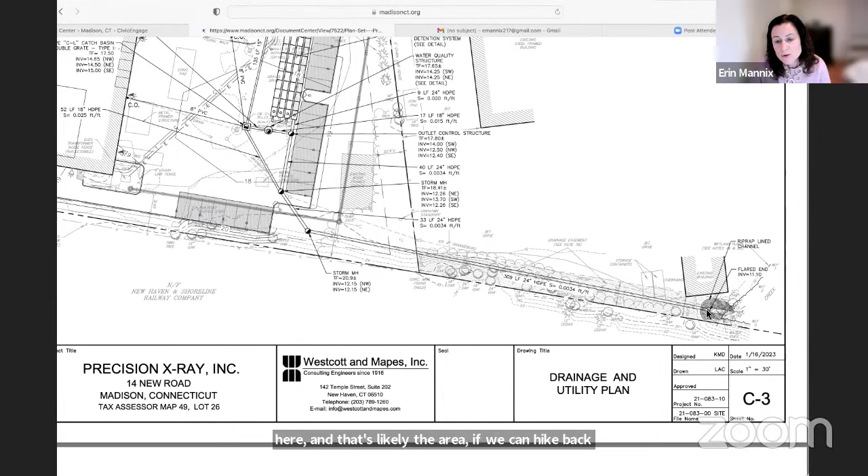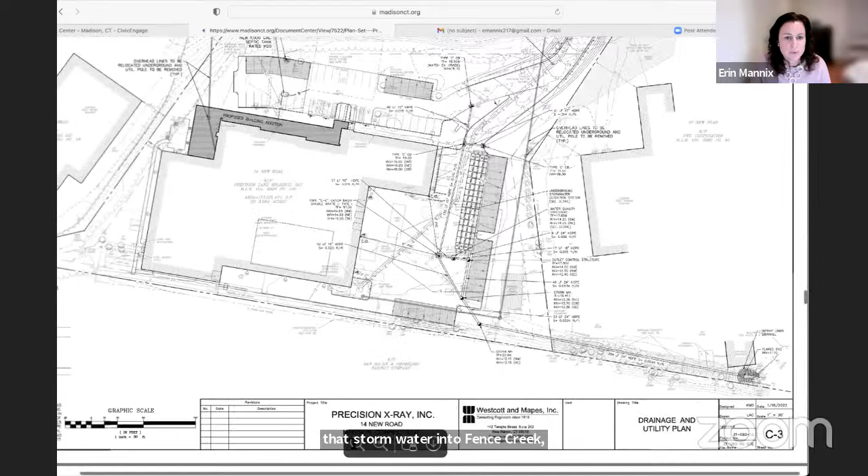As part of the overall application process, the engineer will detail the treatment of stormwater prior to discharge into Fence Creek. At this point, my understanding is that stormwater is not being treated.

Go ahead, Bob. I just want to make sure our jurisdiction emanates from the fact that there's going to be substantial runoff into this pipe and then into the wetlands. Well, this pipe is being replaced. This is all new, so this is a regulated activity for installing this storm drain.

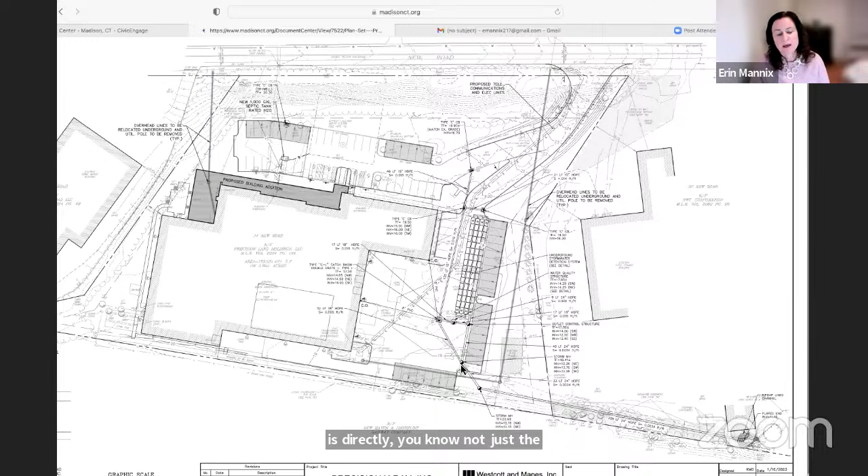You can pull your jurisdiction further, as this is directly the potential impacts of the site improvements on Fence Creek, not just the proposed pipe within the 100-foot upland review area. It's contingent upon them to get approval for the storm pipe or drainage pipe treatment into the wetlands. Otherwise, if they can't use that easement to have the pipe and get the water to drain off, the project probably won't go forward unless they can find an alternative route. So that's why there's going to be a lot of disturbance within either the uplands or the wetlands associated with where that pipe is going.

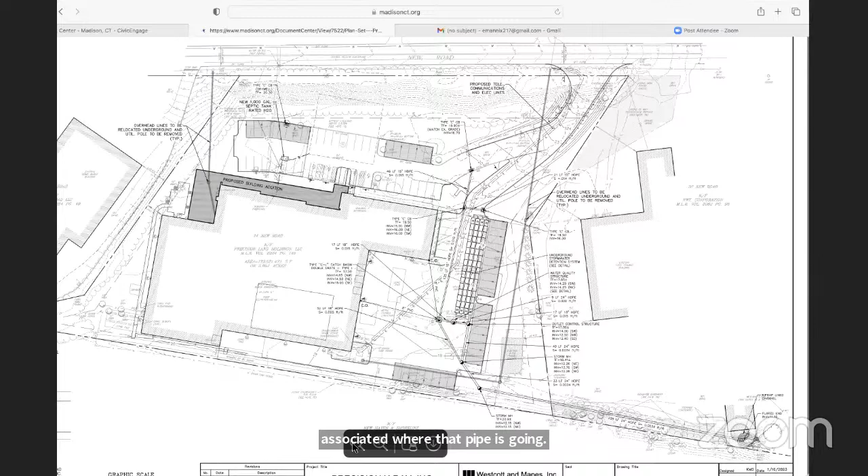I just want to make sure I understand what our role is here. So this is an overflow pipe, essentially, an overflow from the existing system.

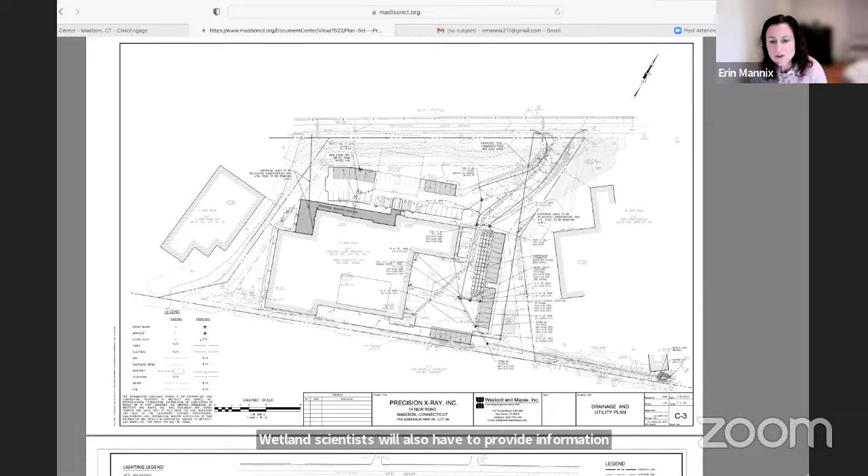So the engineer will detail with you how the storm drainage system is designed to hold particular storm events and to treat the parking lot water. On an industrial site, the roof leader water is also not considered clean water. They'll walk you through the entire drainage proposal and how they're looking to treat that. Their wetland scientist will also have to provide information on potential impacts from the adjacent parking lot improvements as well as the installation of that pipe.

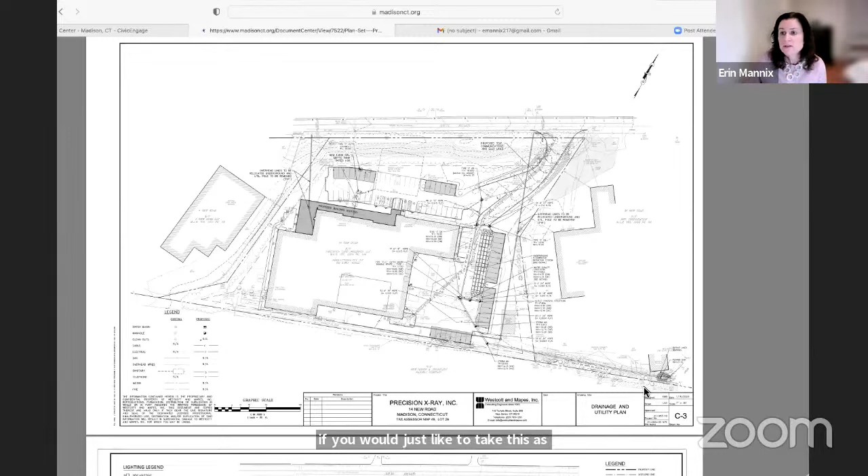So really, this is your question, your time to determine if you'd like this to move to a public hearing, or if you'd just like to take this as a regulated activity permit. Aaron, just so I'm clear, you had your hand raised.

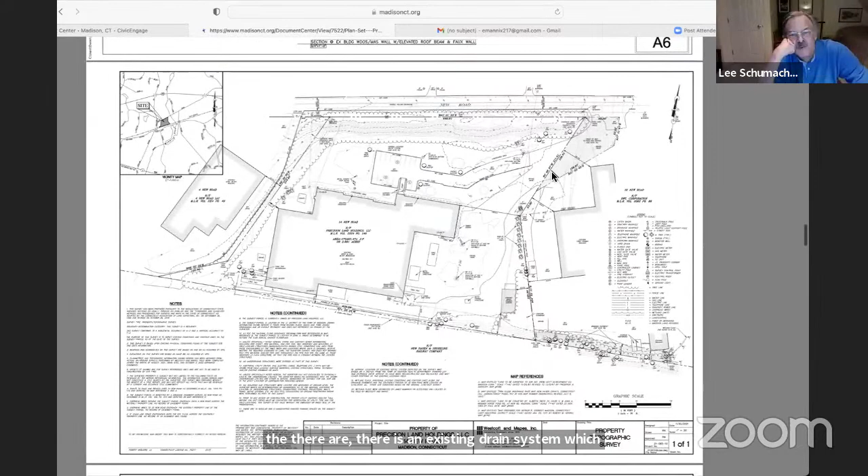All this drainage shown on this plan, it's all existing right now except for the outlet? There's an existing drain system, which I believe there's an existing conditions map. So that's all new on topography, that's all new that we were just looking at as well. Yes, that's all new proposed improvements.

My understanding is it would be designed in accordance with the stormwater manual. Got it, okay. And that's where the engineer will walk you through that design, and the wetland scientist will be present at your next meeting if you have specific questions. So this is basically an upgrade then, from what's happening now, I would think, right? Am I incorrect in that assumption? The treatment of stormwater, for sure, yes. And potentially the capacity.

There's significant flooding issues on this property, if anybody has driven by and seen some of that during a storm. The existing overflow pipe, there are dry wells or an infiltration system, but the overall overflow pipe is an old clay pipe that I believe the engineer said is not functioning. So they've had situations where their roof leaders have backed up into the building during storm events and ponding on the site. Based on the growth of their business, they're really looking to have that mitigated on site and to utilize not only for parking, but to have appropriate storm drainage.